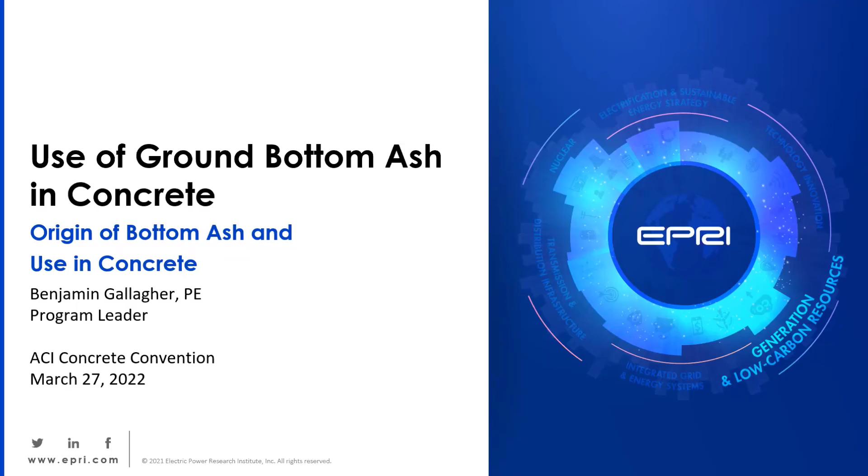So with that, let's see. All right. So why are we here? And before I get too much further along, I'm not a material scientist, so I'm just not going to be able to present at the level of depth as some of the other people that presented before me. But instead, I'll try and talk about the perspective from what we're doing at EPRI.

And I think the main reason we're here is that we're concerned about the future of SCMs in the U.S., and we rely on fly ash as a major source of SCM material to reduce our carbon footprint of concrete. Here's a projection from the Energy Information Administration. This is the U.S. government agency that tracks our energy use in all forms, from transportation to industrial uses of energy to electricity, and they make projections about where we're headed. And this is their business as usual projection. It's actually the 2022, the most recent projection available.

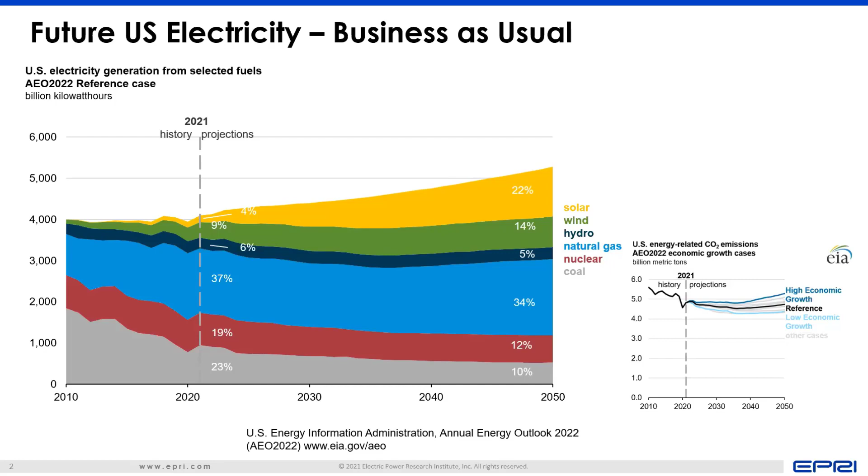And right at the bottom, you can see on the base here for electricity, coal is a major fuel source of electricity in the US, but it's declining. And you can see since 2010, coal has been declining in generation, as we know, and it's forecast to continue to decline. This is the projection for business as usual. So on the right-hand side of the screen, you can see the CO2 associated with these projections, and this is the reference case we're looking at. So this reflects a sort of a stable amount of CO2 emissions, not much decline, not much growth.

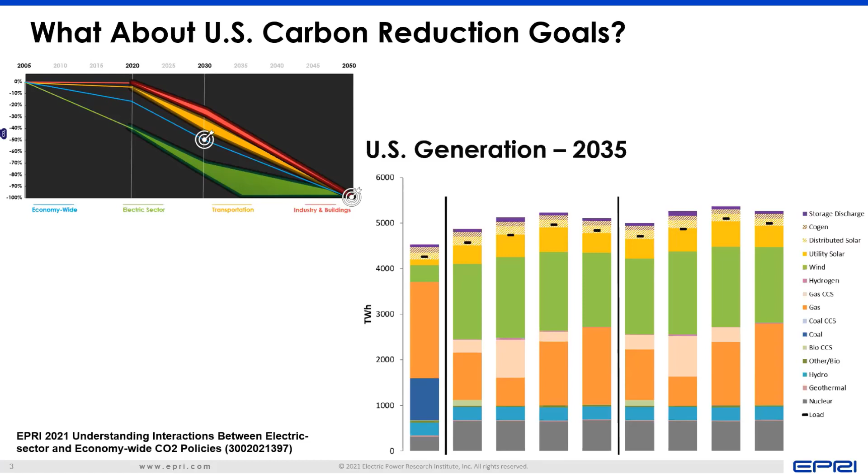So that's a really scary picture. By 2035, there could be very little coal generation, and as a consequence, very little fresh fly ash available. So what do we do to address that? Well, in the short range, we can expand the use of off-specification products. So as Cole mentioned, bottom ash is rarely used as SCM. It has other uses. It can also be used for roofing shingles or as a media for blasting, for removing material, abrasive blasting.

It has other uses, but we can put it to a better use, I think, as we're seeing, through use as a SCM. There are other SCMs available, spray-dryer absorber materials, that we won't talk about today. And then, as some of the other speakers mentioned, harvesting ash from existing impoundments and landfills.

There's just tremendous resource, over 2 billion tons of CCPs in the US that could be put to use. And in particular, 560 ash ponds in the US are closing or will be closing soon. And in both of those, in landfills and especially in ash ponds, fly ash and bottom ash are often commingled. So it's not a matter of us deciding we want to use bottom ash. If we're going to tackle harvesting of materials, we're going to have to tackle bottom ash.

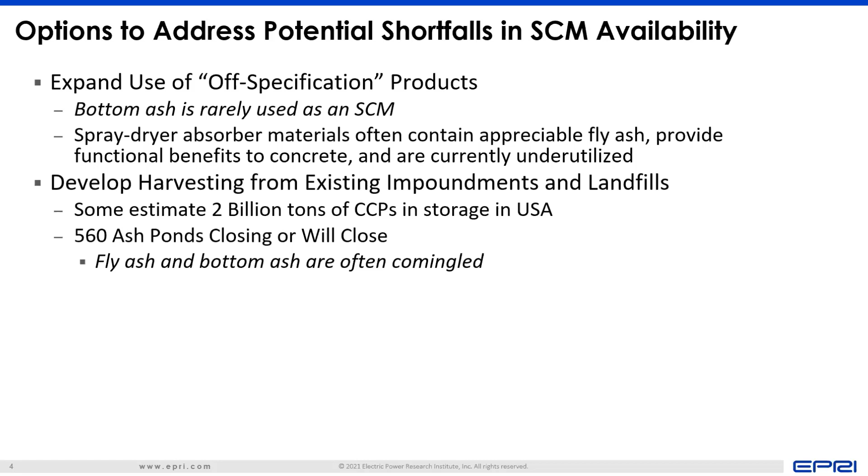I wanted to mention that some of the other speakers have talked briefly about where bottom ash comes from and kind of shown the diagram of a power station. But I wanted to just mention that there are a few different types of power stations. The predominant technology in the US is called pulverized coal combustion, and it's characterized by high combustion temperature and small coal particle size. The fuel that we're feeding to it is a small size. And in that type of combustion, it tends to produce about 10 to 20% bottom ash and 80 to 90% fly ash.

The design of those facilities, the boilers, they actually have two different types of designs, a dry bottom and a wet bottom. And that's important because in a dry bottom, the bottom ash falls to the bottom of the boiler and cools all in air. In a wet bottom boiler design, the ash particles fall out of the burning zone and they're partially cooled in air and partially cooled in water. So both of these, dry and wet, constitute the most common power station design.

Another design that's somewhat similar to pulverized coal, but much less common in the US, is a cyclone boiler. So this is still a very high combustion temperature, but it's designed to produce bottom ash. So it takes coal at a large particle size and ends up depositing almost all of it in the bottom of the boiler. The boiler designs on these are always a wet bottom where the ash particles are cooled or quenched in water.

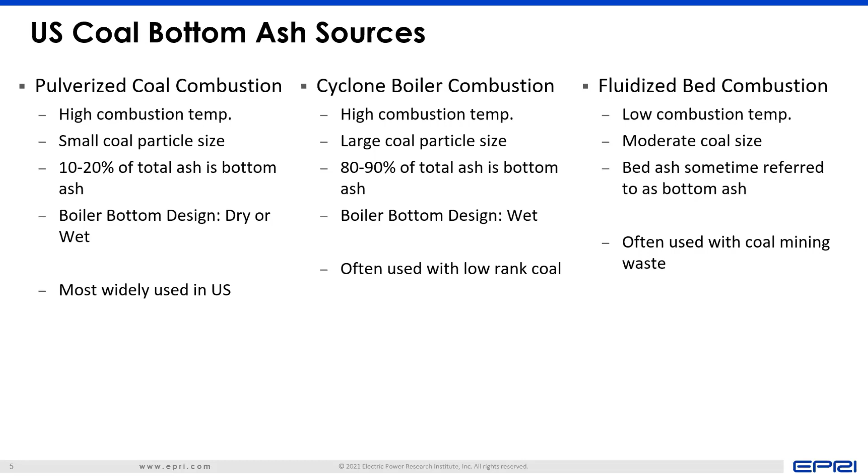And then I wanted to mention a little bit more about pulverized coal combustion. When coal's mined, it's crushed, and then at the power station, it's pulverized and classified before it's burned. And that's really important because it controls the particle size of the feed. So the typical specification for coal that goes into a utility boiler is 99% passing 300 microns and 70% passing 75 microns.

So you can tell already this is really fine material. And when we think about bottom ash, we may think about particles that are maybe even larger than what we're putting into the boiler. So that should tell you immediately that what's happening in the boiler is not, we're not getting chunks of coal falling through the boiler. It's all burning up, and then the particles are agglomerating to get larger ash particles.

So bottom ash isn't a waste material with things that didn't burn properly. It's a product of combustion and melting and fusion, just like fly ash is. It just maybe the particles have agglomerated differently than the particles that were carried up in the boiler. And just sort of as a reminder, the coals we use in the US, they tend to range from maybe 80 to 90% combustible material. So they tend to have this ash content of maybe 10 to 20% ash.

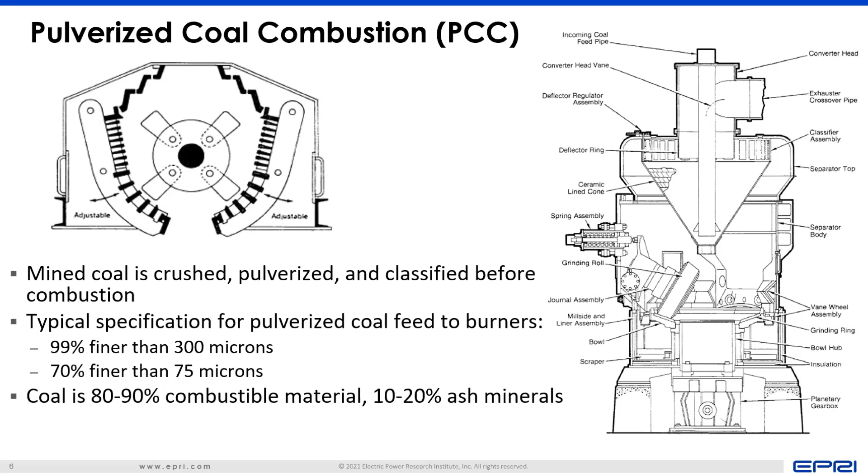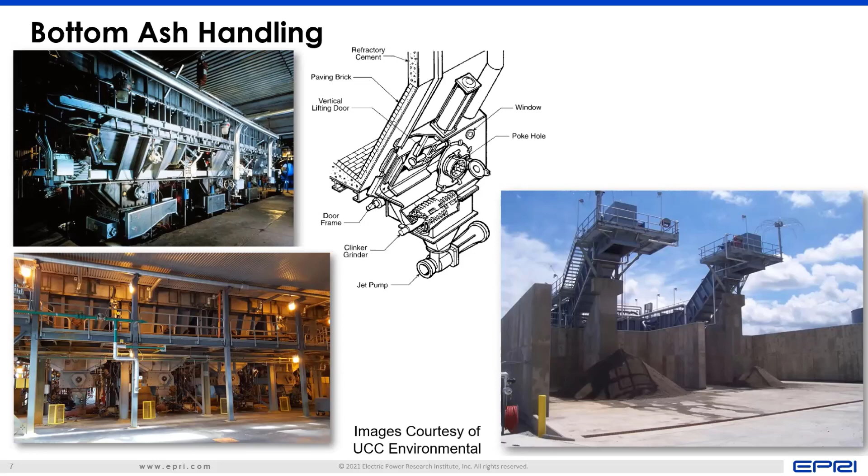I wanted to focus on one particular ash that we did some testing, and you actually heard about it in an earlier presentation, but I'll try and tackle it from a different direction a little bit. So this is from a 2.9 gigawatt power station. That's pretty big, but not the biggest. They burn a subbituminous fuel, Powder River Basin. So that should produce a Class C kind of ash. The composition is pretty well understood to produce that.

This station has 4 subcritical boilers that are about 7 megawatts capacity each. And it's got a dry bottom design with dry ash handling. So there's no water at the bottom of the boiler to quench the ash or transport it away. The composition you can kind of see here. The important thing to note is about 21% calcium oxide content, really low LOI. And there's a picture of a bucket sample of the material we were testing.

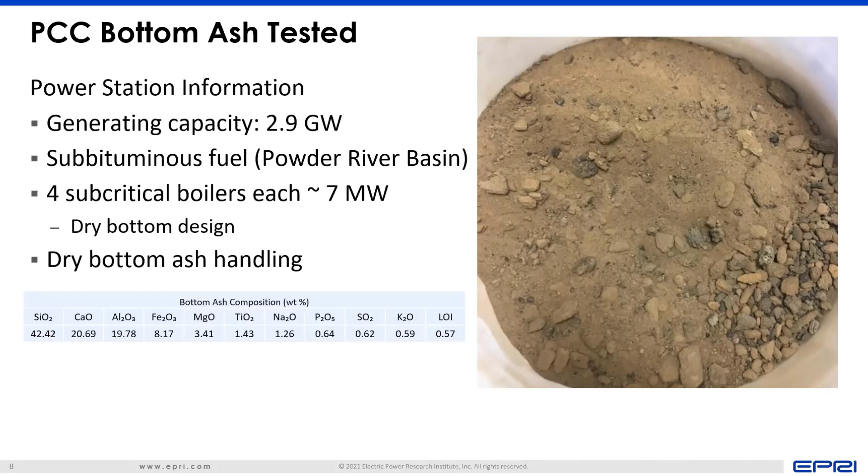So what I'm going to talk about are some results from a project we did with Oregon State, and one of the presenters already talked about these results, so I'll go through them kind of quickly. In this project, we used a commercial tolling company to grind bottom ash, and they targeted a 50% diameter of 19 microns, or actually 20 microns. They undershot it a little bit. We were shooting to make about the same 50th percentile as we think of fly ash, which is about 20 microns, 50th percentile.

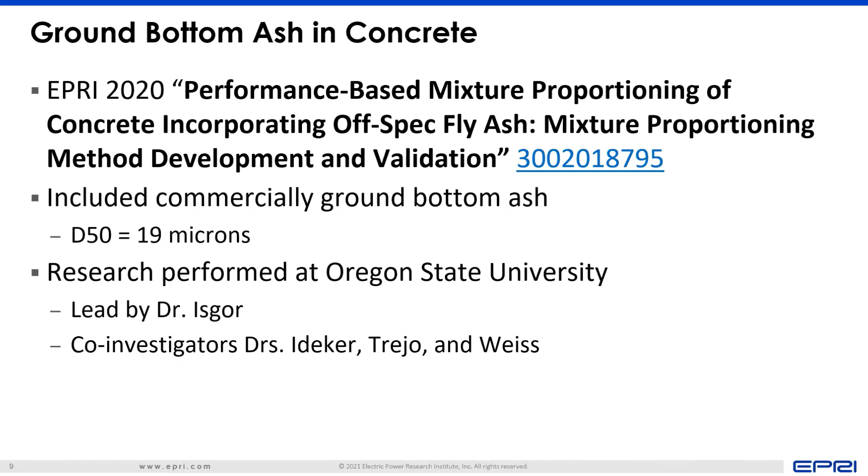So the PI was Dr. Isgor, who I don't know if he's still here or not, and some other folks. So you can ask them all the tough questions. I'll just show you some pretty pictures that they made for us. So this was the project where we talked about performance mix design and using thermodynamic modeling and pore partition modeling to arrive at a concrete mix design.

And I think you may have already seen this diagram. In the previous presentation, they just focused on one of the concrete mixtures, but the Oregon State team actually made three different concrete mixtures targeted to different applications. So these are on the left-hand side. You can see the performance criteria that they developed. This was what we were setting out to meet.

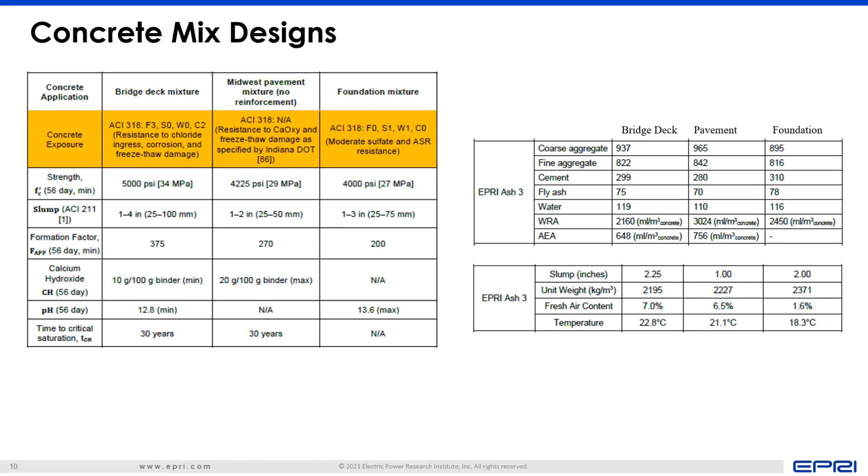And then they developed a mix design with this Ash 3, which was from that power station I just talked about, the dry bottom with the dry handling and the commercial milling to 19 microns average particle size. So three different concrete mix designs that were actually made. And these are the characteristics of the mixes as they were made.

And this is where they were targeting in their modeling, targeting one mix outside of the performance feasibility space in their models. So the idea was to check to see that they weren't under predicting the performance. If we could get it outside of the model, then that would tell us that we knew where this boundary was from the outside, and then a couple on the inside of the feasibility space.

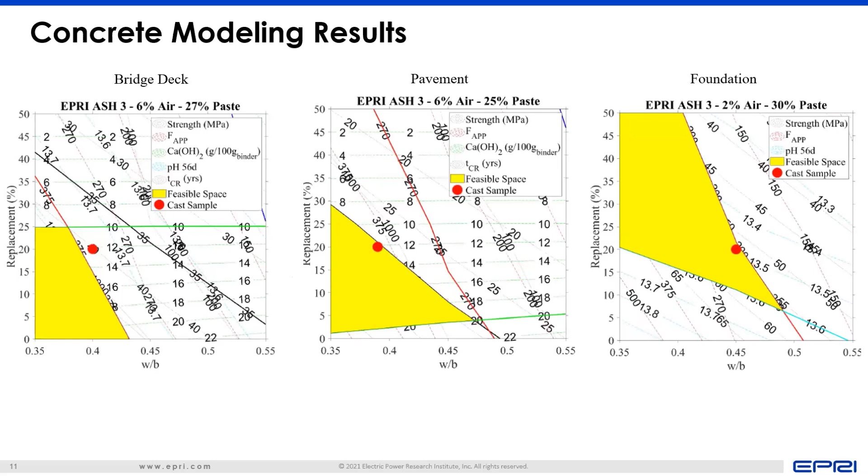And they were successful. So, I apologize, these figures have got results from several different coal combustion products, but what we want to focus on is the yellow bars for Ash 3. That's the ground bottom ash. And we met in terms of strength. We met all the strength that we had anticipated.

We met the apparent formation factor, except for bottom ash 3, and that was intentional. That was where we were outside of the feasible space. We also met our pH and our calcium hydroxide content.

So the reason why I wanted to run through this is it showed we could make concrete with bottom ash that met all of our performance criteria. So I thought, in addition to learning about the modeling and using the modeling, just showing that we could make the concrete meet performance criteria was valuable for the audience and for this session.

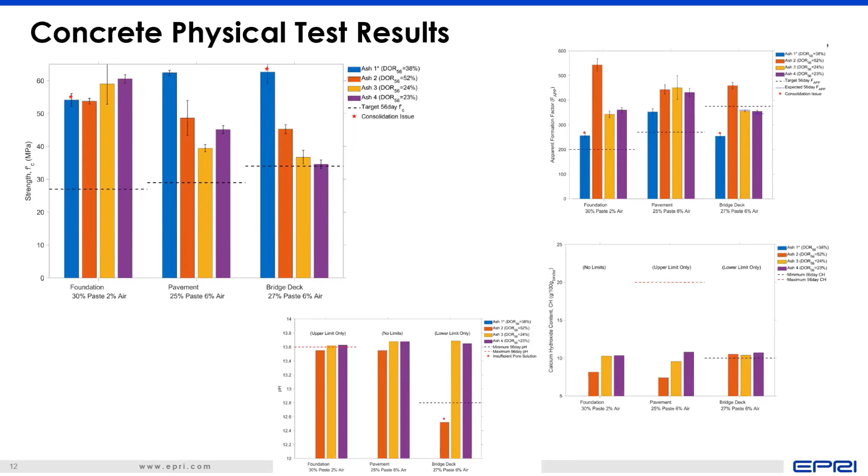And then I want to mention a research project that I happened to see a presentation on at the end of last year. Dr. Bošnjak from University of Stuttgart presented on ground bottom ash as an SCM, focusing on bottom ash materials from Germany. I thought this was interesting.

We're not alone here in the US. It's not just US and Canada. A lot of people are interested in ground bottom ash. I think there was also a presentation from some folks working in Malaysia on this issue. So yeah, I think there's worldwide appeal to it.

They did a good range of testing, but what I want to focus on is mortar strength results, a strength activity kind of test using ground bottom ash at 4 different finenesses. And the way they express this is less than 10% retained on 45 microns, so pretty aggressive grinding, making it very fine, and then all the way up to bottom ash ground to between 40 and 45% retained on the 45 micron sieve. So that would be something that wouldn't pass C618 criteria.

It'd be too coarse. And they tested this at three different cement replacement levels, 10, 20, 30%, and they evaluated mortar strength all the way out to 90 days. They met the mortar strength requirements, so the percentage of their control. And by the time they got to 90 days, all 4 of these bottom ashes, even the coarse bottom ash, exceeded the control strength. So it was very successful. Seemed to be contributing to strength at the long term.

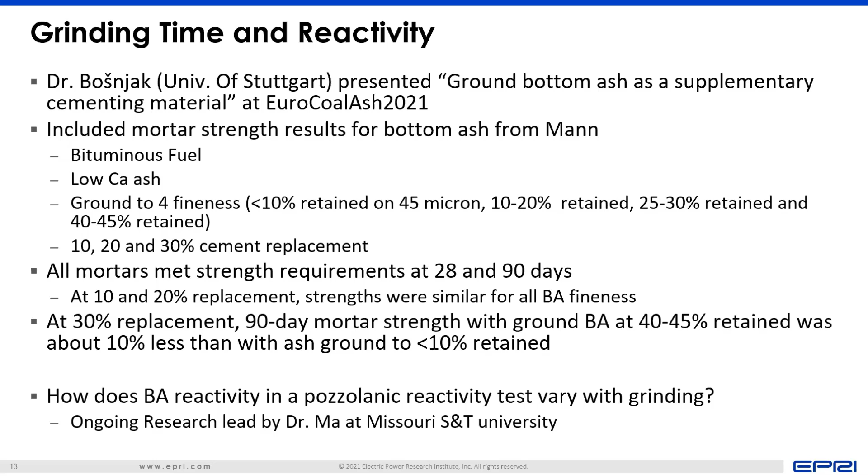And I happened to be talking with Dr. Ma at Missouri S&T, my alma mater, and thinking about this problem. And so he's been working on some research, and I want to present some of the preliminary results, just thinking about grinding and particle size on this one particular ash that we already made concrete with.

And this isn't the commercial grinding that we did for the previous study with Oregon State. This is just in a lab. So these numbers don't really relate to a particular commercial piece of equipment. This is a disc, vibratory disc grinder. So it'd be more aggressive than the ball mill that Cole used, for example, but it doesn't directly relate to a commercial piece of grinding equipment. But nonetheless, we know that something ground for 20 minutes used more energy than something ground for 2 minutes. Which was what I was trying to understand.

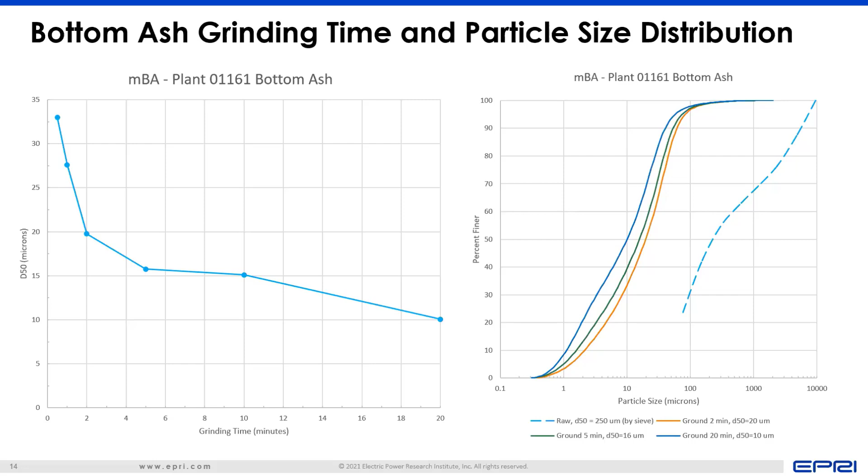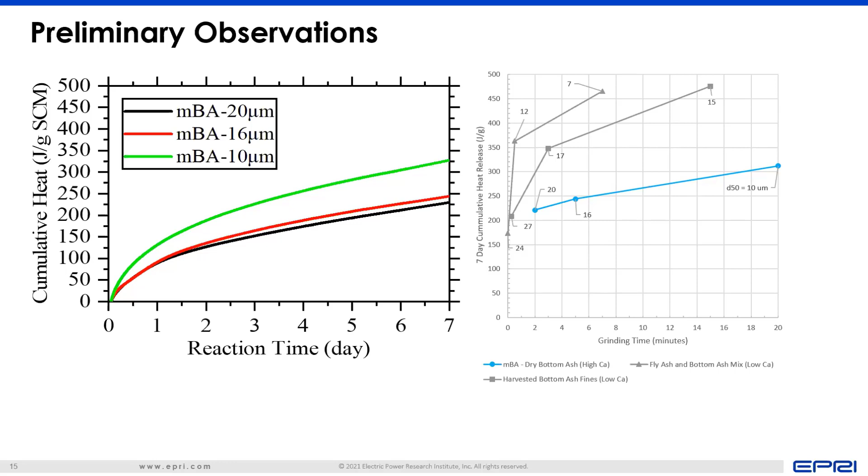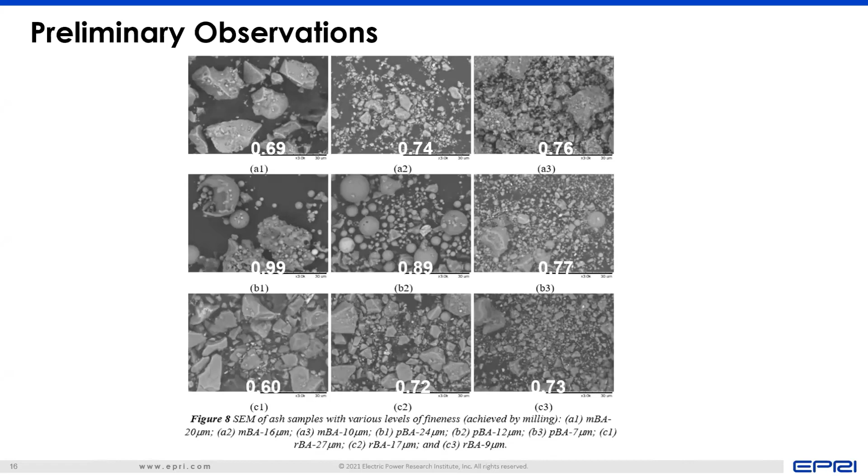Yeah, thank you. So with that, I just wanted to make a few conclusions. If you can get information about the power station where you're getting ash samples, that's really useful for some of us to hear, so we can relate it to other power stations and make predictions about an ash at a different location. I think evidence shows you can make successful concrete with bottom ash that achieves strength and is durable. And then, as you'd expect, grinding seems to increase reactivity.